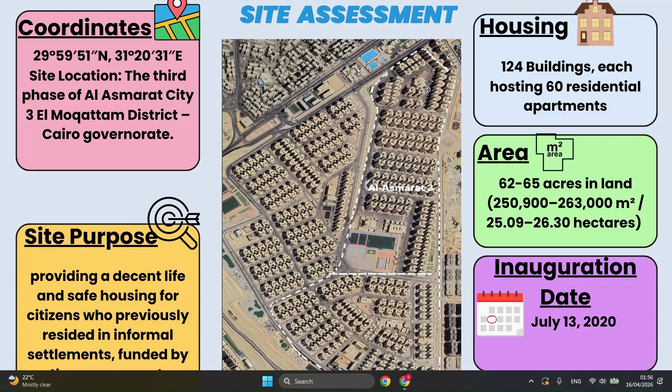We chose a place that has 124 buildings, each with 10 floors and 60 residential apartments, totaling 62 to 65 acres of land, and was finished in 2020.

Now for the site challenges: citizens faced dissatisfaction with costs. 92% of residents struggle with high rent and utility bills, and 84% can't find stable jobs locally, so they have to travel, as you can see on the map, dozens of kilometers, which costs them transportation fees and is a burden to travel to their former workplaces.

There is also a livestock ban, so no raising birds or livestock is allowed. People have lost their source of income, and daily logistics are cramped in units with little storage.

As well as educational infrastructure, only 2 schools exist in phases 1, 2, and 3. The schools host a total population of 18,000 units, each averaging 2 children, that's more than 36,000 children in just 2 schools.

With the loss of social capital, the high-rise design of El Asmarat 3 has caused spatial estrangement and intense police activity, frequent patrols, rising crimes, inadequate passive design, and waste management issues like frequent garbage and unsanitary conditions. Surveys conducted by the UN settlements show that this is true.

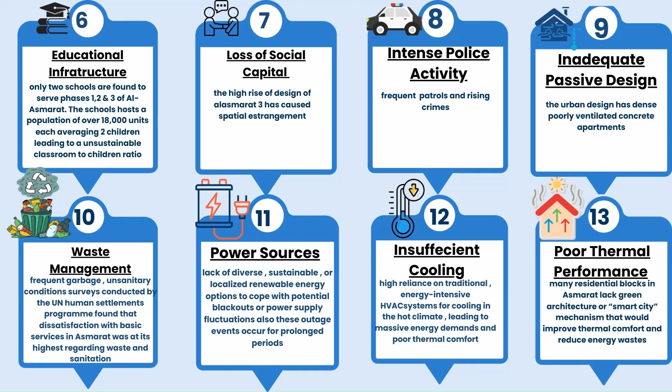Power sources are not renewable energy and there's insufficient cooling, with high reliance on traditional energy-intensive HVAC systems in a hot climate. So poor thermal performance is also one of the main problems.

Now going into the detailed breakdown of living costs: we have water, natural gas, and electricity in the summer, totaling to about 8,978 Egyptian pounds of fixed costs, including transportation, health insurance, and educational fees.

That leaves only about 1,367 Egyptian pounds for the family to survive, which is not sufficient for them, especially in emergency situations. This is considering a net monthly salary of 11K, the average salary of a nurse and a high school teacher.

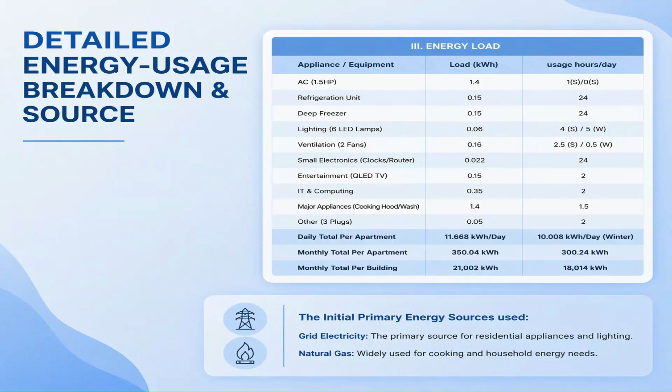Since most households have access to television, recorded content is a more inclusive option for students with limited internet access. Volunteer teachers could prepare lessons on weekends with incentive bonuses, and recordings could be distributed on flash drives by age groups. To further reduce overcrowding, students could rotate between home learning and in-person attendance on a weekly basis.

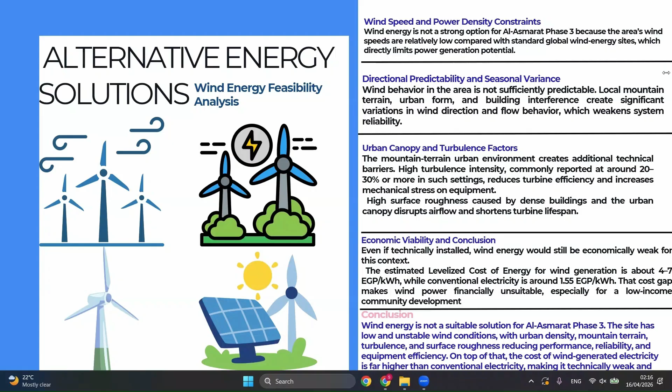Now for alternative energy solutions, we analyzed wind energy feasibility and found it was not feasible due to multiple factors such as wind speed and power density constraints, directional predictability, seasonal variance, and urban canopy and turbulence factors. We determined it to be economically unviable.

For the final energy feasibility study: geothermal energy has high initial construction costs. Biomass energy is impractical because transporting and storing bulky agricultural waste in a high-density urban area is a logistical nightmare. Concentrating solar power is high cost and only suitable for large-scale projects.

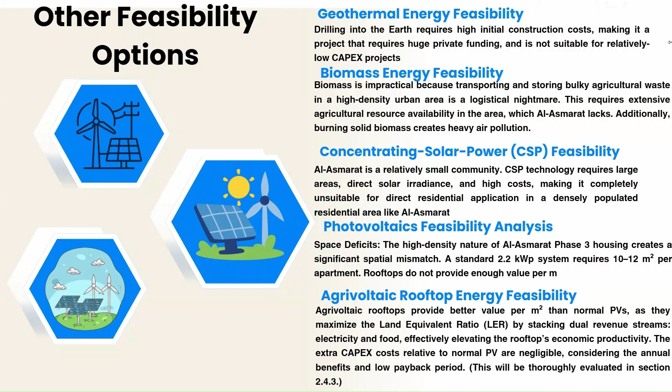Photovoltaics does not maximize the value per square meter. However, agrivoltaic rooftop energy does.

Hydropower and CHP biogas: for hydropower feasibility, traditional hydroelectric power generation via the Nile River is technically and economically non-feasible for the Asmarat Phase 3 settlement. However, greywater hydropower (GWHP) is the only viable hydro resource for the urban environment.

Combined heat and power biogas plant feasibility: a centralized combined heat and power (CHP) biogas plant would be a highly feasible solution, converting the community's organic and sewage waste into resources. This is our proposed self-sustaining system summary.

The proposal presents a modular, low-maintenance, and cost-effective self-sustaining system for dense, low-income communities. Because rainfall is limited, it does not depend on rainwater harvesting.

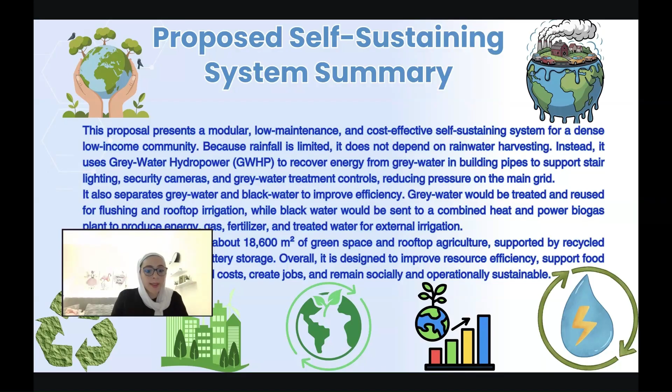Instead, it uses greywater hydropower to recover energy from greywater in building pipes to support stair lighting, security cameras, and greywater treatment controls. We have two categories of systems: Category 1 is the greywater hydropower, and Category 2 is black water to sewage to biogas to irrigation of land gardens.

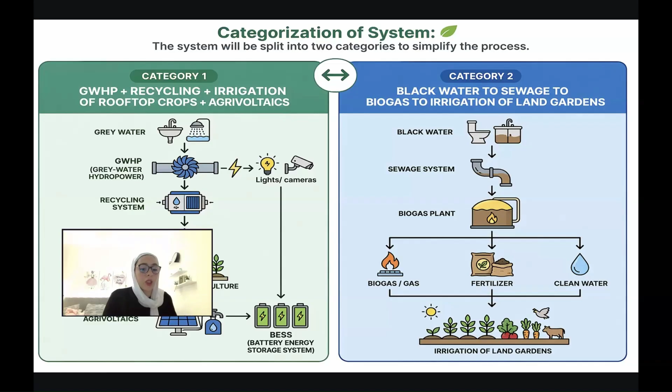Objectives: Number 1 is providing cheaper energy bills, overall bills. Number 2, enhance security within the building. Number 3, decrease theft and vandalism.

Number 4, lower pressure in sewage water. Number 5 is less carbon emission. Number 6 is finding local job opportunities for all the residents. Number 7 is lowering temperature inside homes, reducing use of the HVAC system, providing 24/7 localized power for critical community infrastructure, lighting, and security mainly. Number 9, an energy recovery WEF nexus, a self-sustaining low-cost closed-loop system.

Number 10 is building entirely with commercial off-the-shelf (COTS) parts. Number 11 is higher crop yield due to partial shade from shade-attracted plants, mainly.

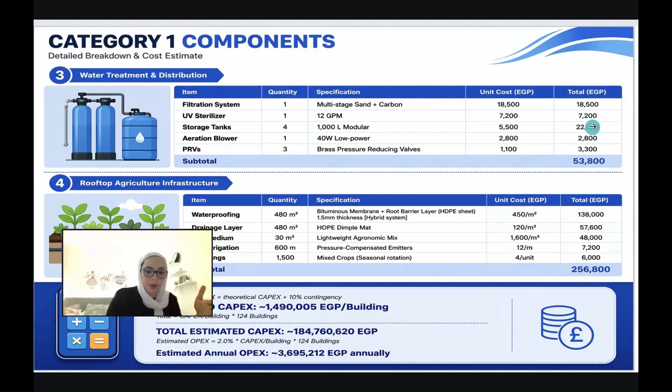Here is all of Category 1's components, detailed breakdown and cost estimate. Same here for water treatment distribution and rooftop agriculture infrastructure. And here is the Category 1 process.

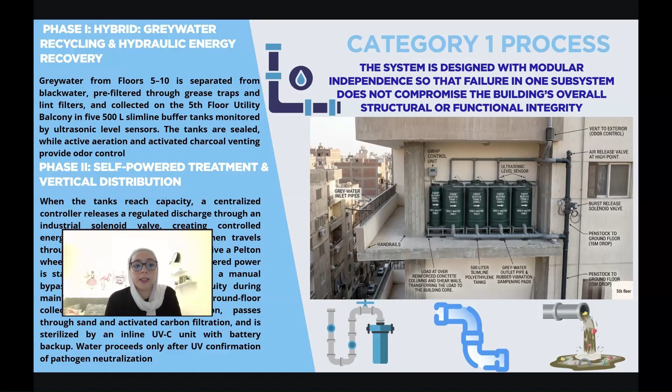Phase 1, hybrid greywater recycling and hydraulic energy recovery: greywater from floors 5 to 10 is separated from black water, pre-filtered through grease traps and lint filters, and collected in the 5th floor utility. Phase 2, self-powered treatment and vertical distribution.

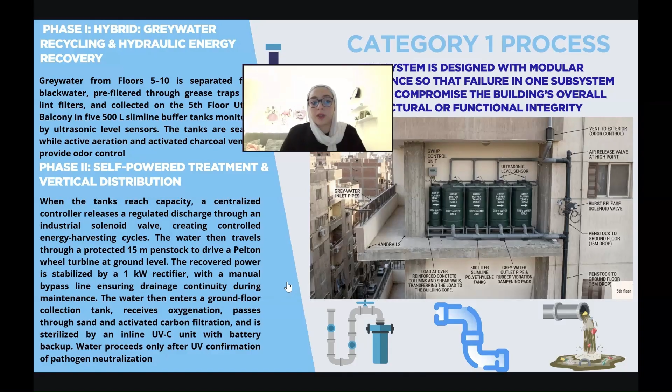When the tanks reach capacity, a centralized controller releases a regulated discharge through an industrial solenoid valve, creating controlled energy harvesting cycles. That's a picture showing everything.

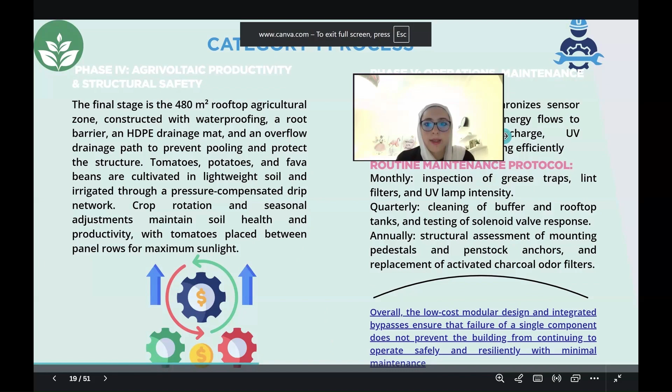Phase 3, photovoltaic generation and microgrid governance. Treated water is pumped by a DC surface lifting pump to 4,000-liter rooftop storage tanks for toilet flushing and rooftop irrigation. That is the Category 1 process.

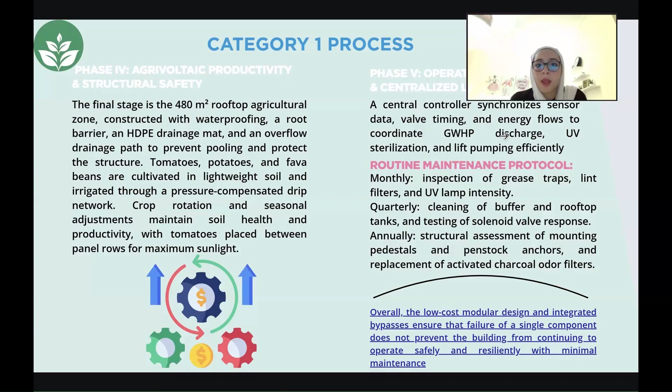Phase 4, agrivoltaic productivity and structural safety. The final stage is a 480 square meter rooftop agricultural zone. Phase 5, operations, maintenance, and centralized logic.

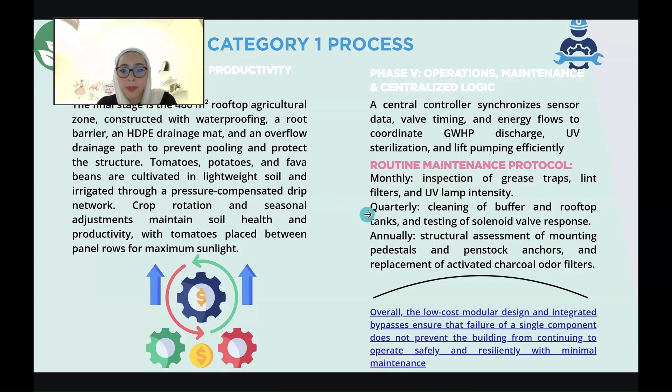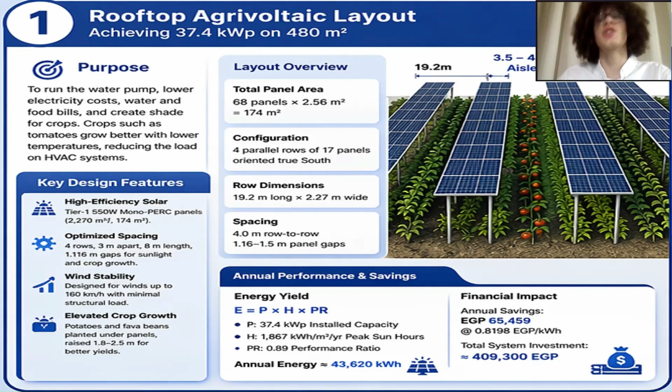Now for the rooftop agrivoltaic layout, its purpose is to run the water pump and lower electricity, water, and food bills, and create shade for crops such as potatoes, tomatoes, and fava beans.

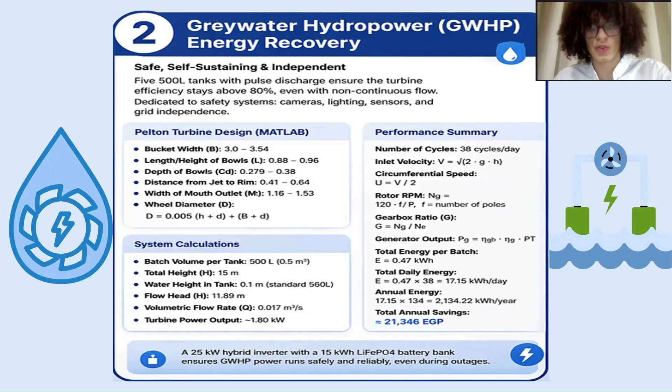Now for the greywater hydropower energy, it will be used as an energy recovery system, not a financial source of income, hence its low daily energy, which is why it will be powering the sensors and other subsystem categories.

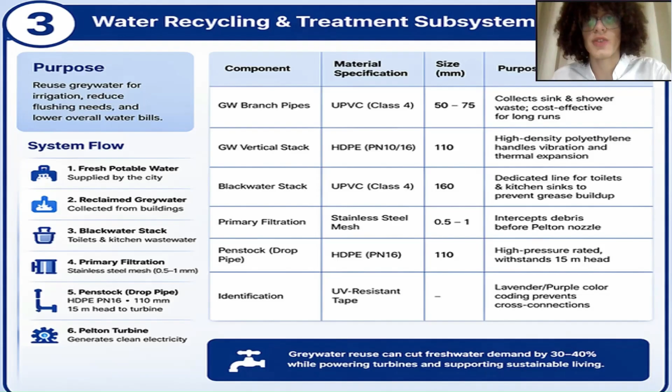For water recycling, the treatment subsystem will collect everything with these components as shown. For toilet flushing and rooftop irrigation, these are the statistics laid out below, with the payback period being 6.59 years and 620 jobs provided for the community, roughly an 8.3% increase in jobs for the entire community.

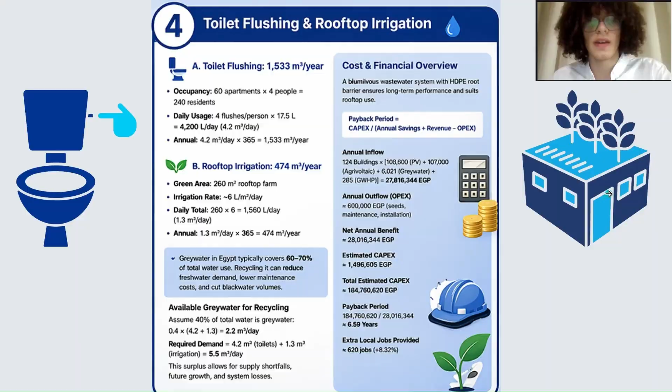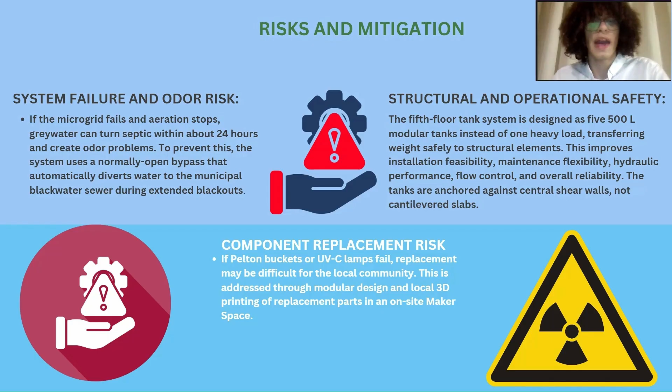Now for the risks and mitigations: system failure and odor risks. If the microgrid fails, the aeration stops. It can turn septic within 24 hours and cause odor problems. To prevent this, we have provided cautionary measures.

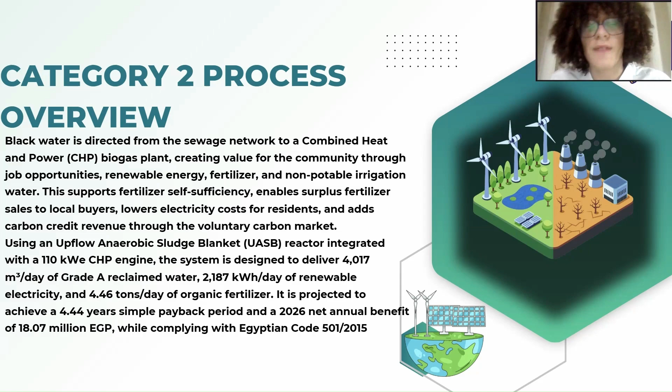Now for the Category 2 process overview: the black water is directed from the sewage network to the combined heat and power biogas plant, providing fertilizer, energy, job opportunities, and non-potable irrigation water. It is used as a financial stream for the community and for the project's capital investment.

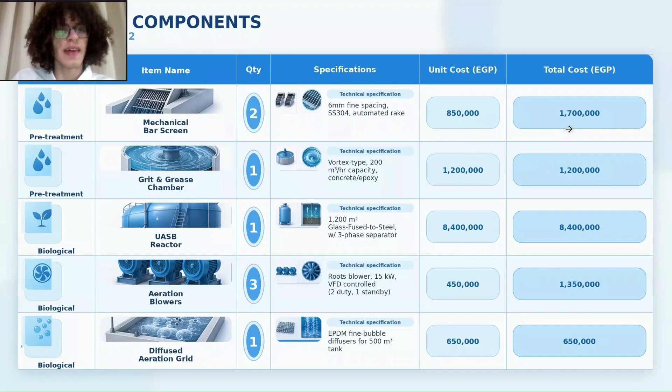We then have a list of all the components with the annual operational costs of 3.4 million Egyptian pounds and 79.2 million in capital investment.

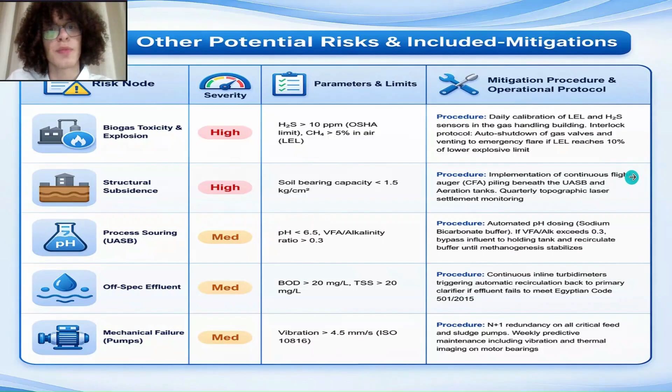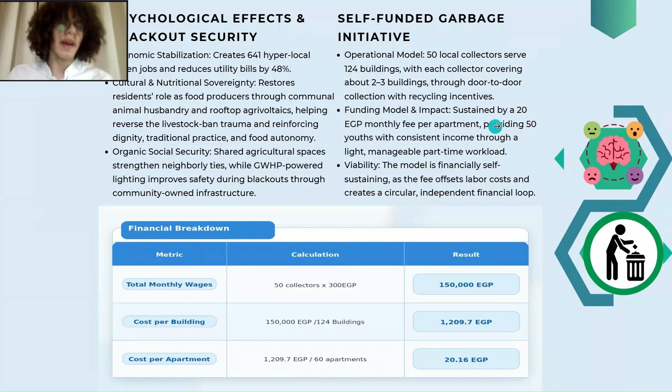It has psychological effects on citizens as well as blackout security, since that happens often in Egypt, with the cultural and nutrition sovereignty and the organic social security and economic stability.

We have a self-funded garbage initiative, which provides 50 local jobs with steady incomes for the youth. And we have educational infrastructure optimization strategy, which we have previously discussed.

And the cost impact and key advantage of it is that it is much cheaper than building a second school, with the same effectiveness and built for low cost community built systems.

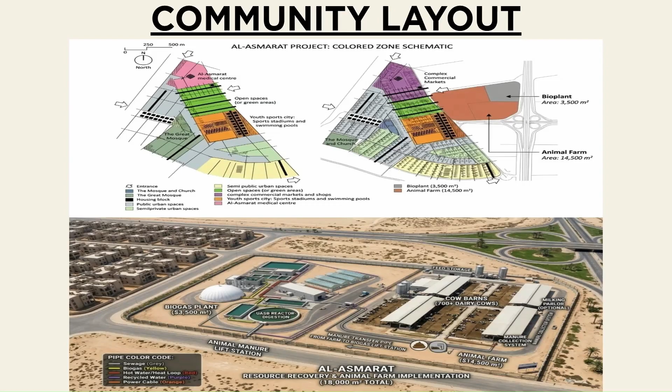The community layout is as seen below. We have the location of every site in the community along with how the biogas plant would look like.

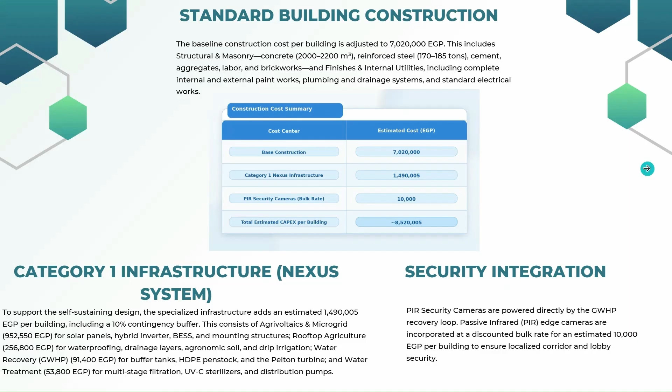We have a standard building construction analysis as seen below, and we have security integration with cameras as well.

And a huge part of our solar and greywater hydropower shields residents from a 70% increase in electricity prices gradually being implemented in Egypt by 2030, and transport savings of providing 641 local jobs, which reduce and eliminate 2,400 Egyptian pounds per month of commuting costs, lowering living costs, and cutting food and utilities by 15 to 20%.

This sustainable shift not only changes our state from a survival state to a more manageable financial margin, but rather a more comfortable lifestyle. And it is structurally safe, risk assessed, and economically viable for low cost projects.